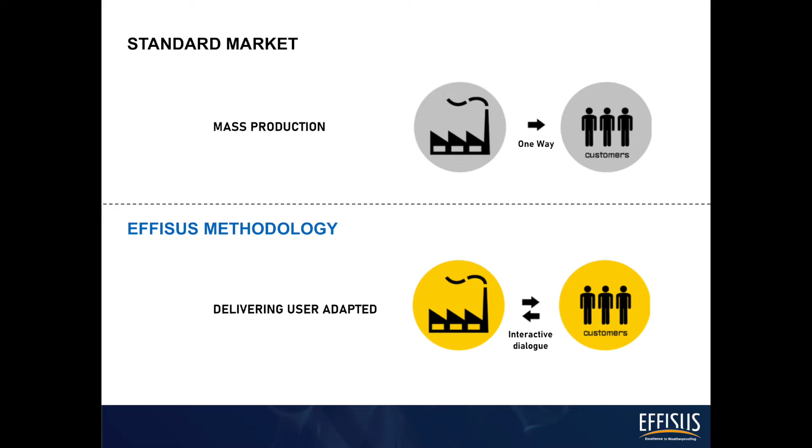Nowadays, facade building projects become more and more demanding and are constantly pushing the boundaries. Currently, facade design is challenged to deliver a unique aesthetic facade - curved, twisted, transparent, etc. - that is energy efficient and fits into an inflexible budget and schedule. In most cases, this is a high challenge.

Why should we consider prefabrication in weatherproofing? We know that weatherproofing is a commodity in general, but facades nowadays require one step ahead from picking up an existing product that must be adapted. It's really critical that we have solutions that fit into each project's needs. That's when prefabrication enters, because it provides a reliable solution made usually at the factory in a much more controlled environment. Rain, wind, cold temperature - factors faced at the site - will not interfere with the final output, and we will have an installation with perfect conditions.

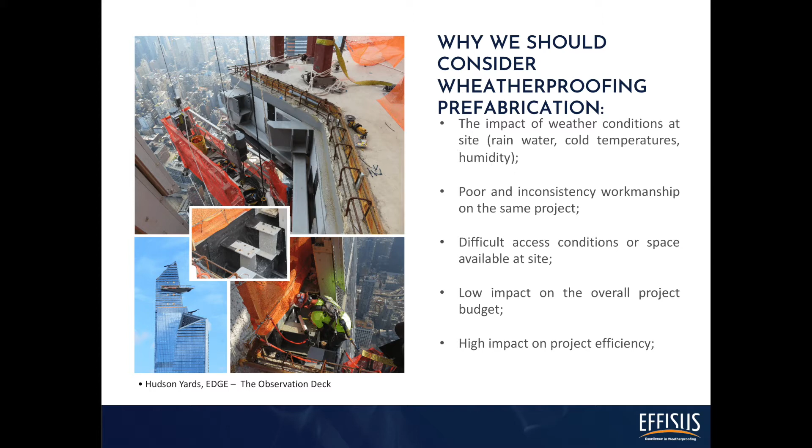Another important thing, and a big advantage, is that at the factory we have better and more stable workmanship - some people with over 20 years of experience doing that task. When picking weatherproofing prefabrication for a project, we have an enormous impact in terms of efficiency and quality, but a very low impact on the overall budget of the project. From these pictures, you can understand the importance of having this type of piece already prefabricated.

Understanding that seals are crucial at interfaces between elements such as windows and curtain walling and the surrounding construction - such joints are particularly vulnerable to water and air leakage, and as such it is vital that a robust and durable seal is provided, one that works throughout the building's life expectancy. Typical membrane materials such as EPDM, ethylene propylene diene monomer, have been used for this function, due not only to their ability to resist the passage of water and air, but also for their flexibility, which aids installation and allows for a good seal to be formed whilst accommodating movement. Such materials are combustible, however, and careful consideration must be given to their use.

EPDM membranes are in compliance with Approved Document C, Site Preparation and Resistance to Contaminants and Moisture, in relation to the resistance of water from the outside, and also meet the requirements of Approved Documents L1A and L1B in relation to air permeability.

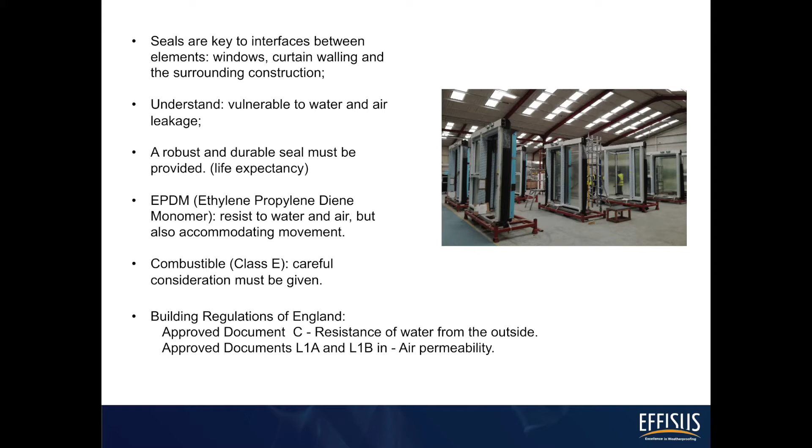Following Regulation 7, Materials and Workmanship of the Building Regulations, Amended 2018, paragraph 2 states that building work shall be carried out so that materials which become part of an external wall or specified attachments of a relevant building are of European classification A2-S1, D0 or A1, classified in accordance with BS EN 13501-1 2018, entitled Fire Classification of Construction Products and Building Elements, classification using test data from reaction to fire tests.

Paragraph 3 lists the exemptions to paragraph 2, including item H: seals, gaskets, fixings, sealants and backer rods. Seals and sealants include, but are not limited to, per CWCT SFE Fire Guidance, Issue 1, September 2020: wet-applied sealants used for example at interfaces between elements at movement joints and panel joints; tapes used for example to seal joints in sheathing boards and membranes; impregnated foam tapes used at window perimeter seals and movement joints; and bonded glazing structural sealant glazing applications.

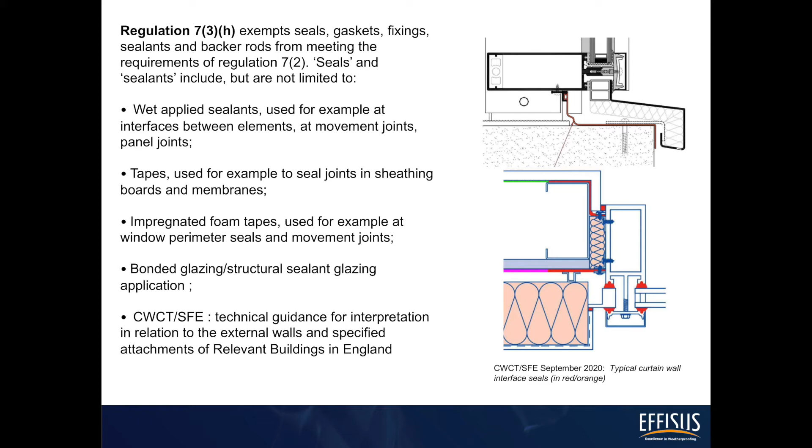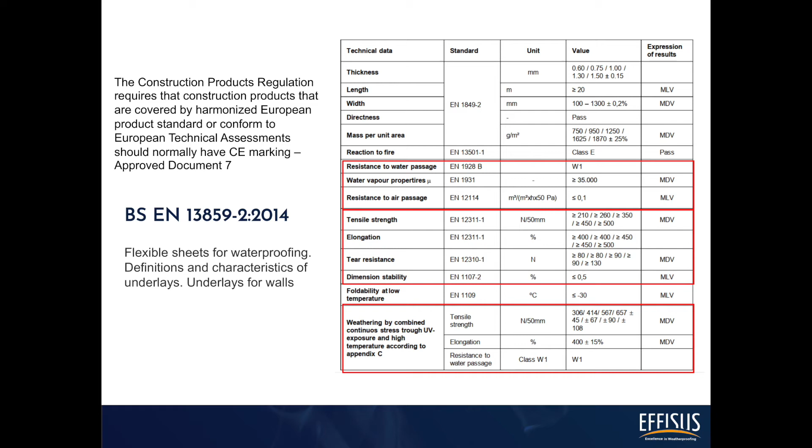Note that the Construction Products Regulation requires that construction products must be covered by a harmonized European product standard or conform to European technical assessments and should normally have CE marking, per Approved Document 7. Materials like EPDM should comply with standard BS EN 13859-2, flexible sheets for waterproofing. Important consideration should be given when picking such types of materials, like resistance to water, water vapor properties, tear and tensile strength, elongation, and other technical characteristics.

It is important to reference the environmentally friendly nature of EPDM. When installed correctly, EPDM has a life expectancy in excess of 50 years. This durability, and also EPDM's ease of repair, reduces the need for EPDM to be disposed of in landfill sites. EPDM sheets can be recycled after use for things such as rubber mats used in children's playgrounds, car tires, or used as fuel to help reduce dependency on fossil fuels. EPDM rubber is the choice for the environmentally conscious.

Not only is it the healthiest option for the planet, but it's also the choice for the financially savvy. Long lifespan and durability mean that replacement costs are far less than the alternatives. During the manufacturing process, a low amount of energy is used, assuring an energy-efficient production method.

EPDM is not only applied on facade projects but also roofing applications. In these conditions, the material is totally exposed, and under the influence of temperature, sun and other weather conditions, the EPDM does not release toxic substances into the environment, remaining always stable due to the special composition. This material doesn't pollute rainwater, so when rain causes puddles on the roof, no harmful chemicals will pollute this rainwater. This means the water will not affect the environment and wildlife and stays safe for rainwater harvesting.

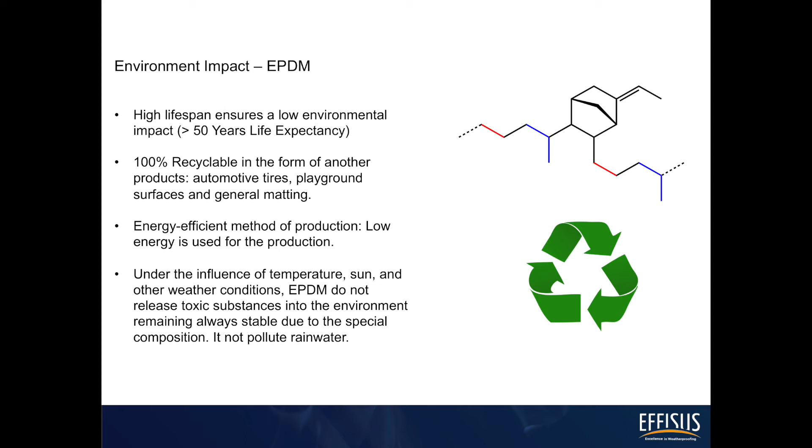On site, it's common to constantly see the workmanship changing and to have multiple teams. Prefabrication allows us to have an increment in terms of quality of the installation of EPDM membranes.

Prefabrication allows us to have an increment in terms of quality of the installation of EPDM membranes. We also have, most of the time, difficult access conditions or space available on site to have a proper work and weatherproofing seal on interfaces, for instance.

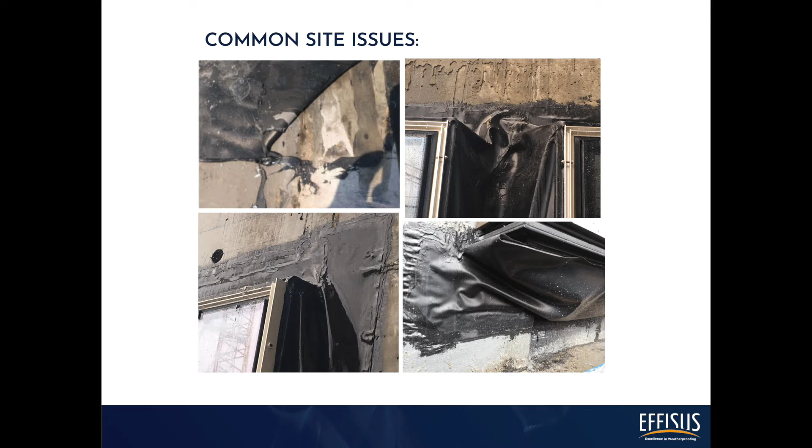Prefabrication increases the predictability of a problem. We are constantly at the site, and problems like this are very common: having different suppliers and different applicators that cannot assure the overall quality of the installation, adhesive failure problems, compatibility of substrates that are not tested previously, and many other factors. In the end, a membrane that should work to waterproof a facade window interface will not fulfill its purpose.

Prefabrication will reduce human error at the site. This type of solution will also have a much faster installation time, leveraging the possibility of installation with a controlled environment at the factory. Specifiers should be aware that when a solution is proposed on their drawings, it should also work well during the installation, having total confidence on the final quality.

One way to protect your design is to promote prefabricated solutions in your projects when needed. We decided to bring a couple of case studies to understand the different possibilities available.

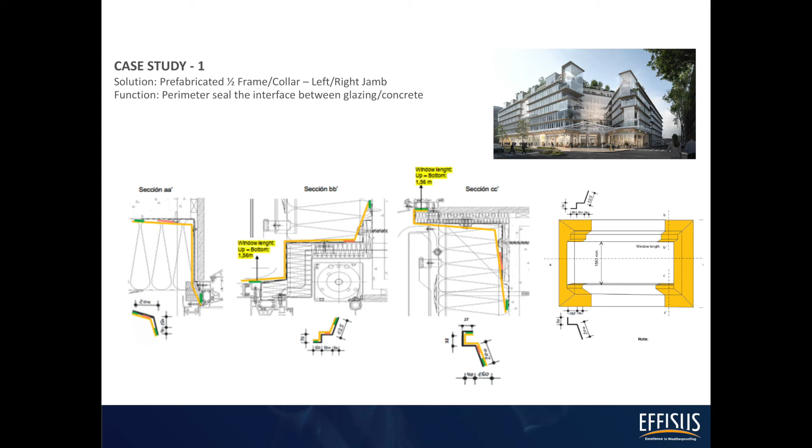Going to case study 1, this is a project located in Paris, France. The challenge here was to find a solution to perimeter seal all the windows to be applied at the factory. The project was composed of over 700 windows with multiple typologies and dimensions.

It was asked to the client to submit the project information, and this is when we start to go into detail. Understanding that even with different typologies, it was concluded that all corners, left and right, and window height are the same. The only thing that will vary is the top and bottom, thus the window length.

In the beginning, it's important to propose multiple alternatives, but the best alternative found was to propose half frames prefabricated, where the only thing that will change is the central part, which was also applied at the factory, but in this case using a standard membrane.

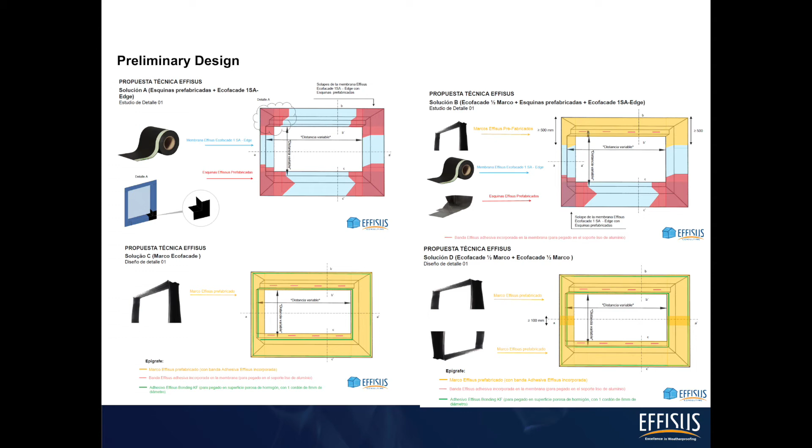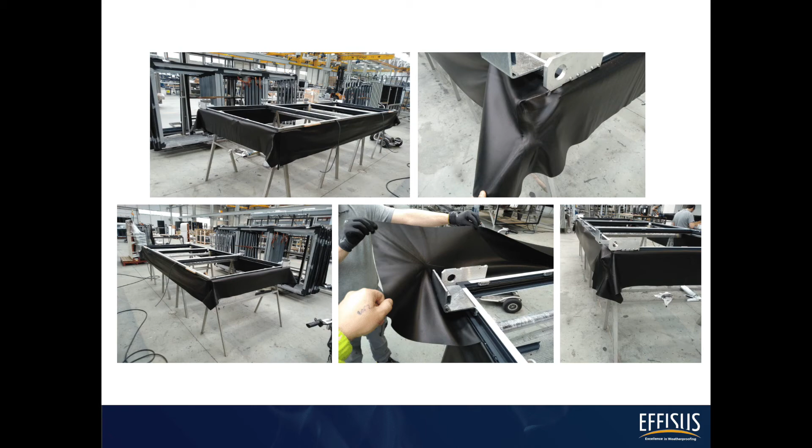You can also see the quality of the membrane installation and vulcanization on all corners, on the top right picture, with no weak points. The corners are always the trickiest part to do on site.

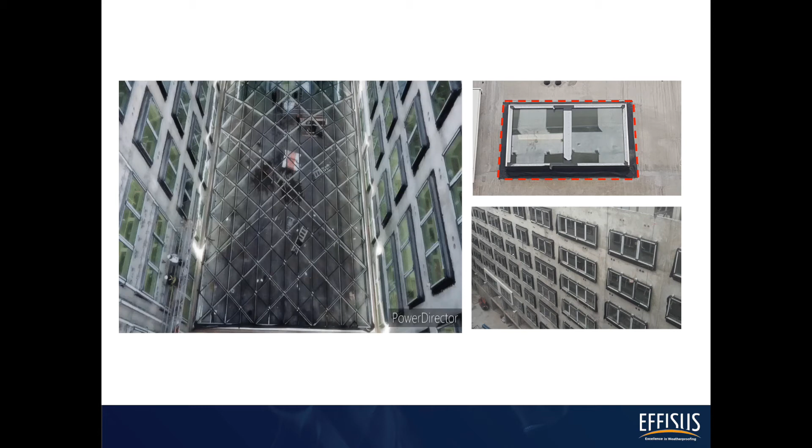In this case study, all the weatherproofing tasks were done at the factory, and the only job performed on site was applying a bead of adhesive sealant on the perimeter of the frame on the back wall, as you can see highlighted in red on the top right picture.

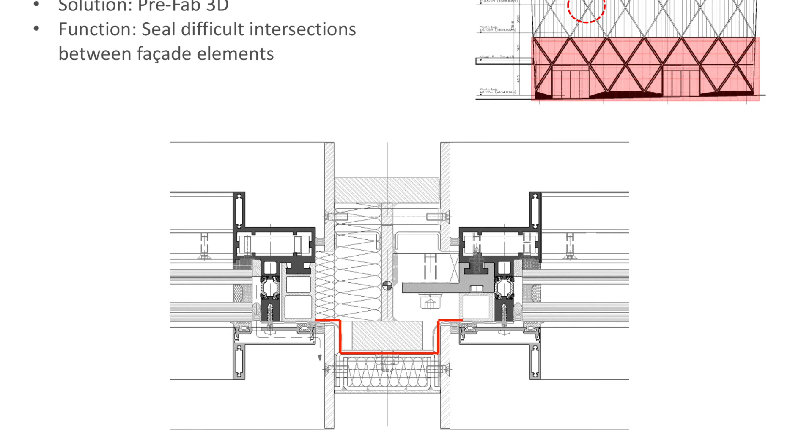Case Study 2. It's an important project that, the more we start looking, the more interesting it became. If we look just at a section cut, we would think it's a simple interface between two aluminium frames, so we would need just a simple membrane to seal and make this link between the left and right frame.

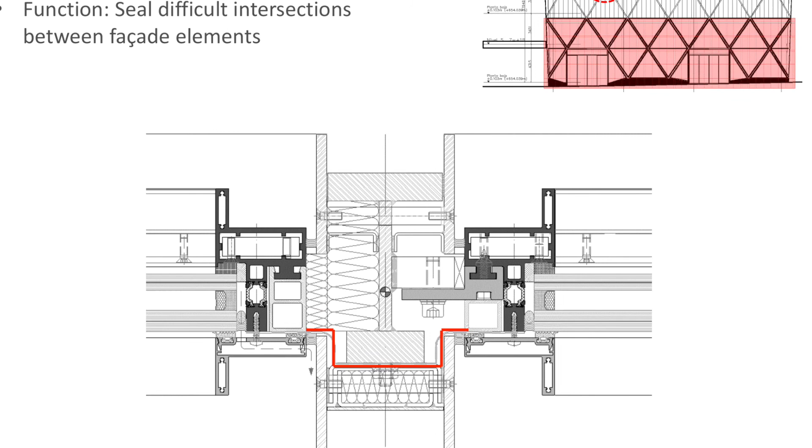However, if we see on the facade elevation drawing on top, we actually have a detail more complicated than just right and left. We have an X intersection of 4 aluminium frames.

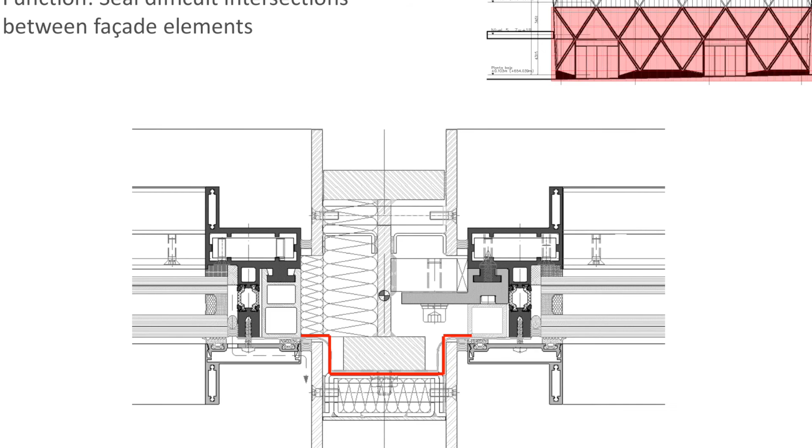This is a project located in Madrid, and to understand it better, some 3D modelling was done. As always, this started in the concept phase, and to have this level of prefabrication done with an EPDM membrane only shows that the possibilities are endless.

To do this type of seal in a proper way at a site would be almost impossible, or with very poor quality, due to the difficulty of the seal with many weak points. Having these 3D prefab pieces in all of the facade intersections allows us a perfect weatherproofing seal.

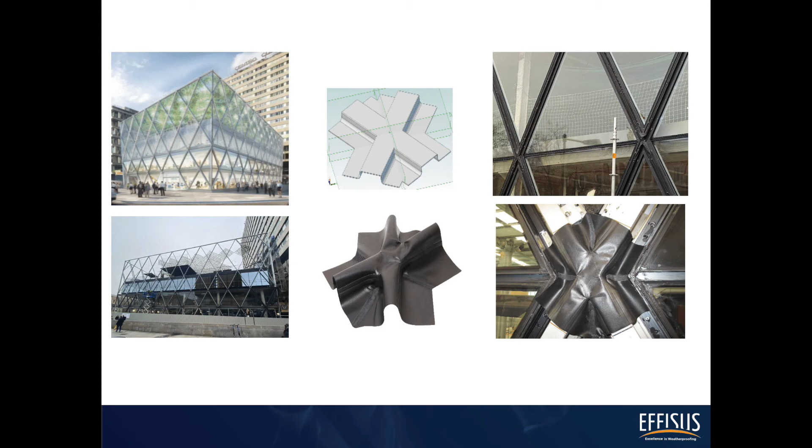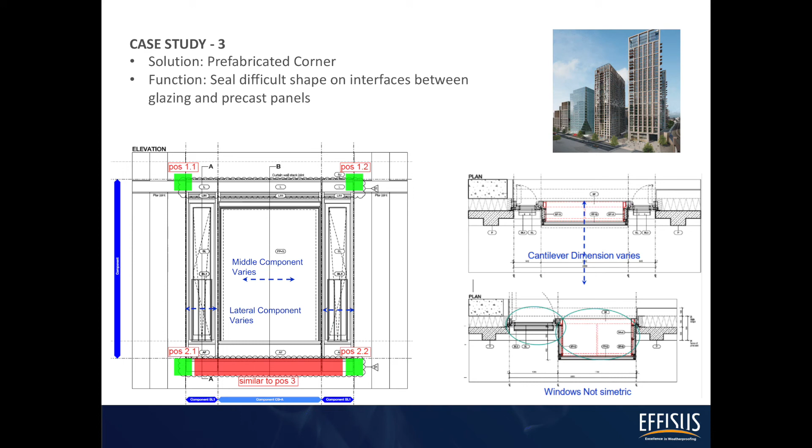Case Study 3. This was a project located in the heart of London. As with Case Study 1, the challenge was the same, but besides providing a window seal, the window corners here were much more complicated. The project was solved after optimizing and understanding its needs, offering 6 types of prefabricated pieces for the corners, as you can see in the images.

And again, the rest of the windows were sealed with a standard membrane. The vulcanization technology used to create these pieces is based on high-tech equipment combined with high temperatures that will vulcanize the EPDM into final shape.

Vulcanization uses heat, pressure, and uncured rubber made of the same elastomer as the sheet or profile itself. With vulcanization, uncured rubber is applied to the membrane joint. After the ends are pressed together, the joint is placed into a hot mould.

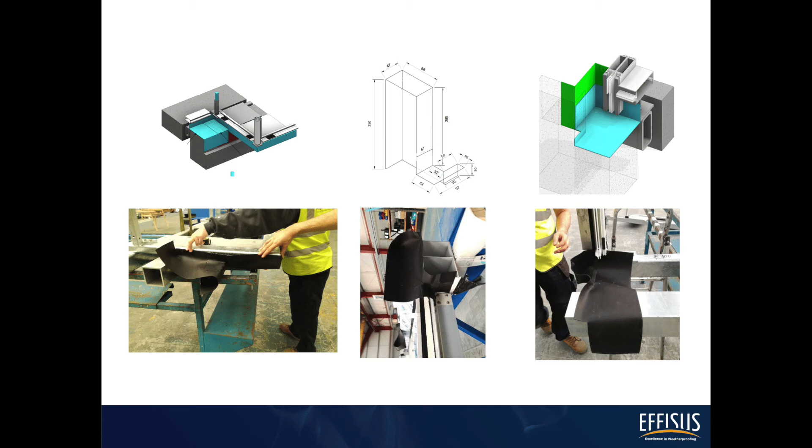Here are some shots from the precast facility. It is possible to see in the central photo at left prefab corners linked with a standard membrane on the central part. Pay attention to the vulcanization quality on the right image.

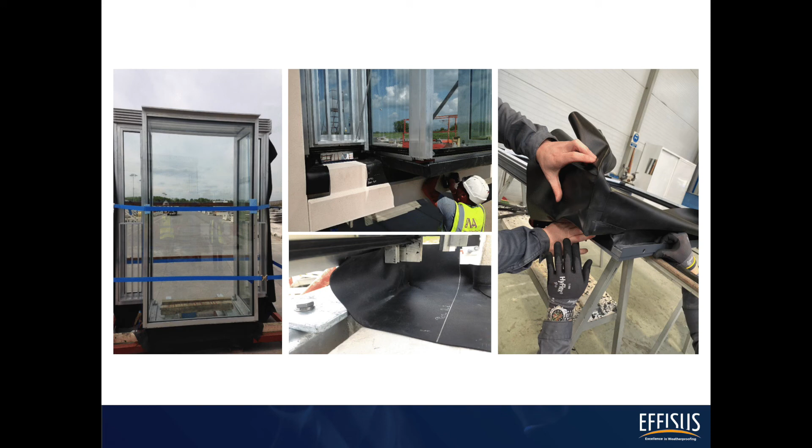As part of a job of proximity and detailing, site visits are imperative to assure proper product installation. It's also important to include a report with comments, photos, observations, and corrective measures.

At this phase, some resistance and difficulty was noticed from the installers to identify the right corner to apply. Considering that this should be a simple and easy process, this was solved with a logistical plan offering a coloured box scheme, where each box has the corresponding corners for the different window types.

Case Study 4 is a curtain wall stick system with a prefabricated balcony, post-fix brackets to ensure the connections to the main building structure or floor slab. Each interface with the steel arms must be sealed in these cases.

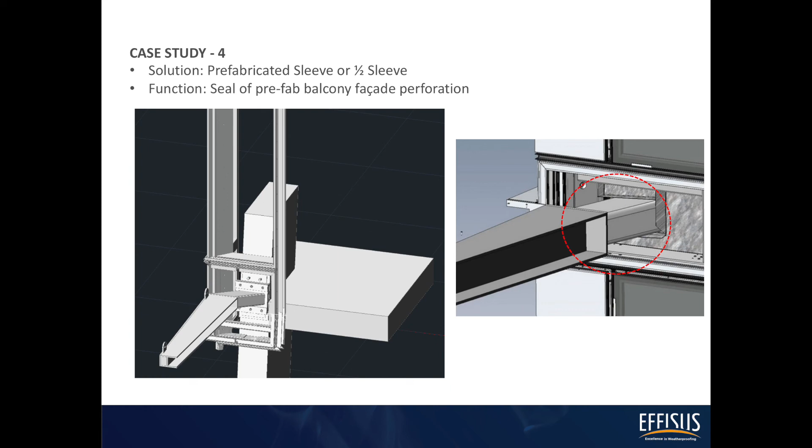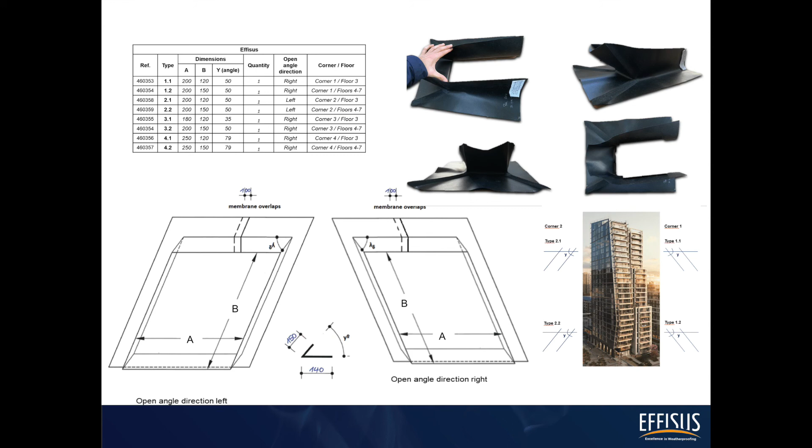What was decided to do here was a prefab sleeve. After understanding the multiple perforation shapes and different angles that will vary depending on the balcony floor level and also the elevation, different prefab sleeve types were proposed.

In Case Study 5, it's a project in the north of England where we have a roof level with a prolongation of steel posts penetrating the coping parapet wall that needs to be sealed. If we don't have the proper solution, we will have a direct leak point into the facade. A solution with a low impact on the project budget, but with a high impact on the whole building integrity.

It was also proposed here prefab sleeves.

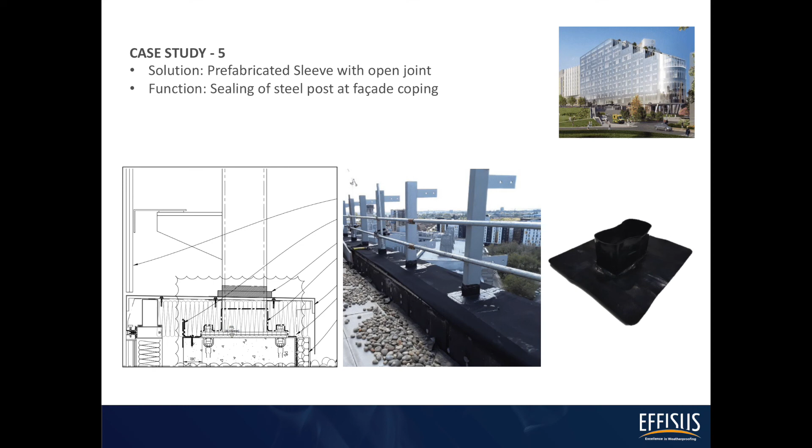Case Study 6 is another project in the UK where the client would like to use a system and an EPDM gasket profile from a previous project they developed for a specific facade system, and they wanted to use the same on this project. However, the specification would not allow doing the corner of the frames sealed using a paste adhesive sealant, with a high standard requirement that all the corners should be done at the factory.

In this case, the client was aware of our vulcanization technology. So we picked up the existing profile and developed a mould to create a double corner joint at the factory.

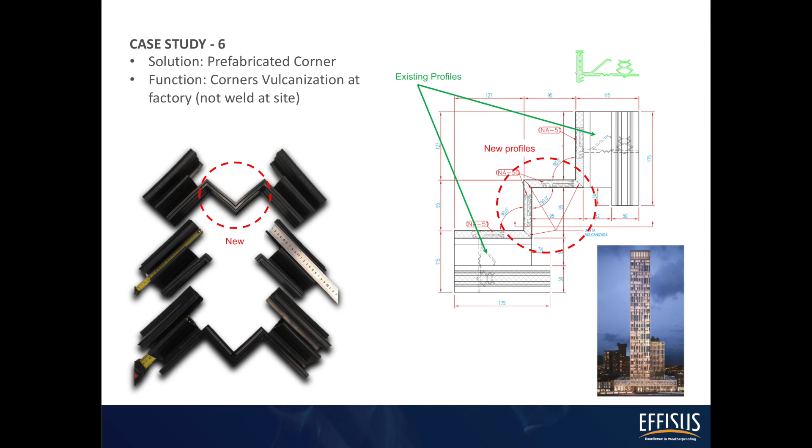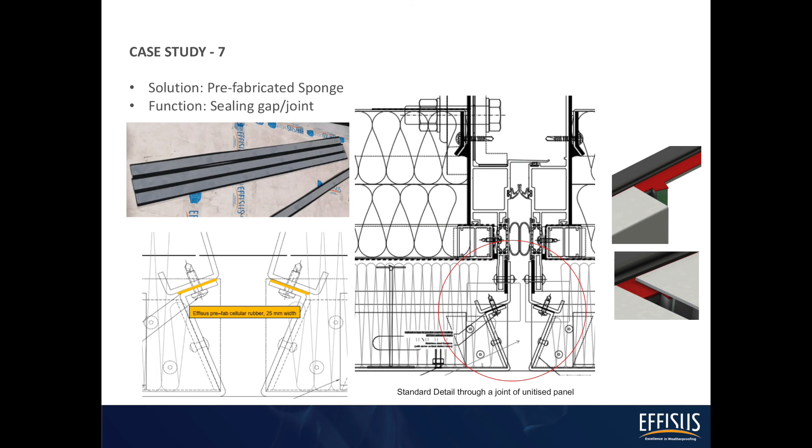Sometimes we also need to seal a gap joint between two surfaces or materials externally positioned facing the outside, so we can also do prefab pieces generally using EPDM cellular rubber that is completely air and watertight, as you briefly see here on Case Study 7. There are also alternatives made of polyethylene or polyurethane base.

Using the technology that is already available, a project need can be fully fulfilled in terms of prefabrication of waterproofing seal, starting with standard membrane rolls going all the way to full customization.

It is important to mention not all projects will require this type of solution, but it is important to know that this is available, and we are seeing more and more specifiers including a prefab piece, a prefab sleeve, on their project when it's needed.

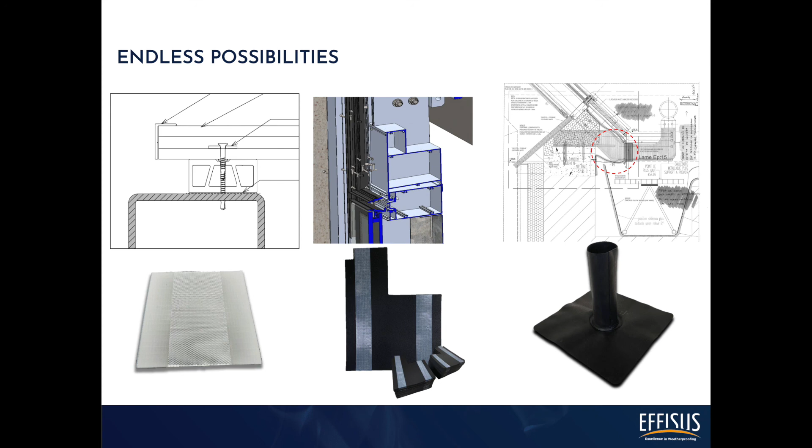The possibilities are endless. In this presentation, you learned about the new technologies and possibilities available on prefabrication to weatherproofing and how to benefit from prefabrication technologies on different facade applications. Using prefabrication solutions, we can improve the project predictability and also raise the facade efficiency and final quality.